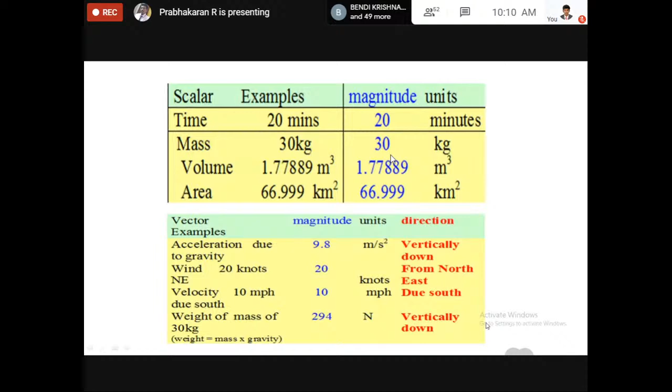In our FEA also, we have a specific topic for the two-dimensional scalar variable problem as the third unit, and the two-dimensional vector variable problem as the fourth unit. In my point of view, compared to all 5 units, the third unit we can understand easily in a technical way as well as the concept and the shortcut way, because we can easily understand the concept through our mathematical concepts.

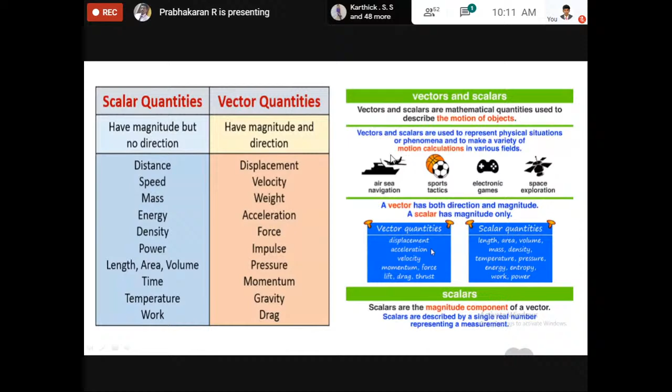So this is the simple introduction for scalar and vector quantities. Examples: distance, speed, mass, energy, density, power, length, area, volume, time, temperature, work. Every such quantity we can define with just the magnitude, but for this quantity we need to explain magnitude and direction. This is very familiar. So now we can move on with the topic.

So next, shape function. Already we have discussed; already I taught only the one-dimensional shape function. So what is a shape function? Why are we using a shape function? The shape function is also called the interpolation function.

So how did the name come? We have discussed that in the previous classes. So I will just recall what the shape function is with some example. For example, I'm going to take a one-dimensional element for understanding the shape function easily. Already we have discussed it; just within 1 minute or 30 seconds, I will recall it.

I'm going to consider my one-dimensional bar element here. This is my first nodal point. This is the second nodal point. I'm going to discuss the two-dimensional, but I just recall the one-dimensional, then only we can understand in a very deep manner. So here, two nodes, we have 2 degrees of freedom.

As well, I'm going to assume the temperature is 10 degrees, and the temperature at the second nodal point is 30 degrees. The total length I'm going to take as 100. So this is an example of a one-dimensional problem. Suppose I want to find out the temperature at the distance 50. What way can we find it out?

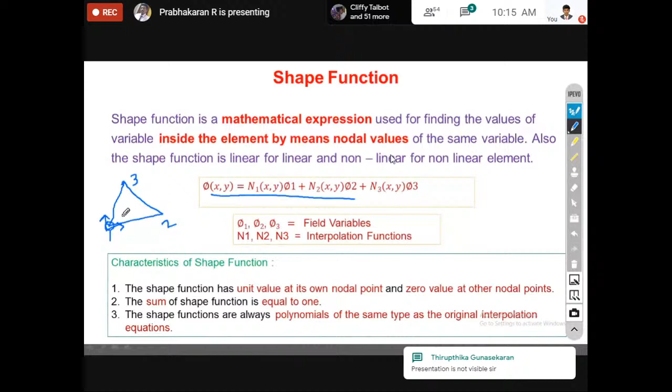So you can consider a triangular element. I'm going to consider it as the CST. I will explain what CST, LST, and QST are in the last lecture. Here I'm going to consider 2 degrees of freedom, 3 nodes, 6 degrees of freedom. From that we can define the CST element. For the 3 nodes, I'm going to define N1, N2 and N3 as my interpolation functions, shape functions. This is my field variable.

So these are the characteristics. I hope you can understand very clearly; this is very fundamental for FEA. Shape function characteristics, which we have already proved: unit value at its own nodal point, zero value at other nodal points. The sum of the shape functions is equal to 1.

We will solve the 2D triangular element shape function and the 2D rectangular element shape function. Definitely we can prove these sum equal to 1. And the shape function polynomial is the same type as the original interpolation equation. This is also a simple thing.

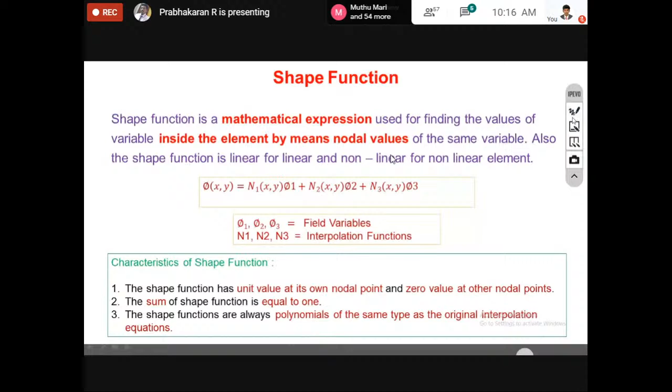Okay. So next, I'm going to consider one triangular element, because with this concept I'm going to solve the 2-dimensional triangular element. Okay, so here, don't worry about the degrees of freedom; I will explain later.

So here the triangular element has 3 nodes: this is the first node, this is the second node, and this is the third node. Every time we need to consider the anti-clockwise direction; as per that derivation it is very easy. I have taken the anti-clockwise direction, so nodes 1, 2, 3 are defined in an anti-clockwise manner. The first node is x1, y1, the second node x2, y2, the third node x3, y3.

So now I'm going to use the area coordinate method; that is the way I'm going to solve for the shape function. I'm going to split this triangle into 3 portions. This is the first node, and the opposite triangle is the area of the first element. This is the second node, and the opposite element is area 2. And this is the third one, the area of the third element. I have split it into 3 elements: A1, A2, A3.

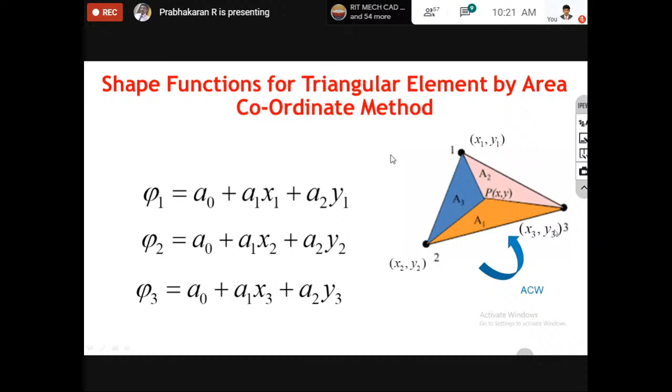Okay, just remember this is node 1. I'm going to take it in the counterclockwise direction: 2 and 3, and this is the central point. So from that I can write A1 as the determinant of 1 x y, 1 x2 y2, and 1 x3 y3. Next, I'm going to write A2 and A3 the same way.

So A2 uses the opposite side, x3 y3 and x1 y1. The same way, area 3 is 1 x y with the first and second nodal points. So this is the way I can write area 1, area 2, area 3, and the whole triangle area.

So now I'm going to substitute all the values in our shape function. Here N1 equals determinant of A1 by determinant of A. N2, N3, likewise I'm going to substitute. Finally, we will check our property, whether the sum of the shape functions is 1 or not.

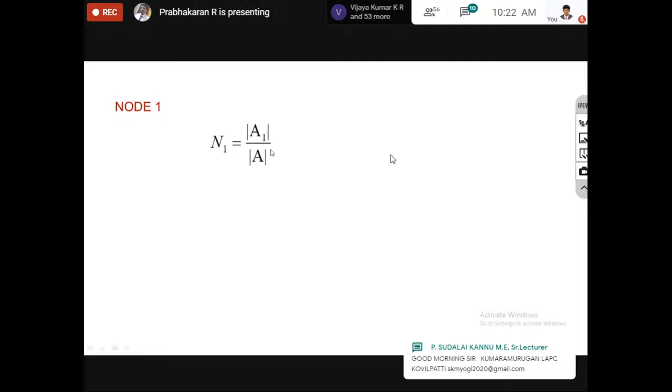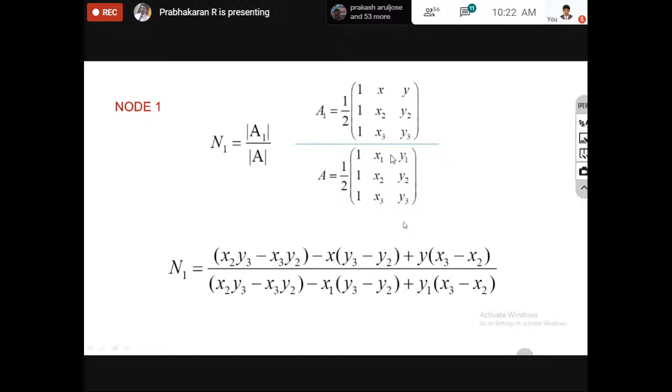So node 1, this is the simplest formula, N1 equals determinant of A1 by A. I can write A1 with nodes 2 and 3, and for the area of the overall triangle I have taken the determinant value. Finally the 1 by 2 will cancel, and the determinant value is achieved like that. I'm going to follow the same for node 2 and node 3.

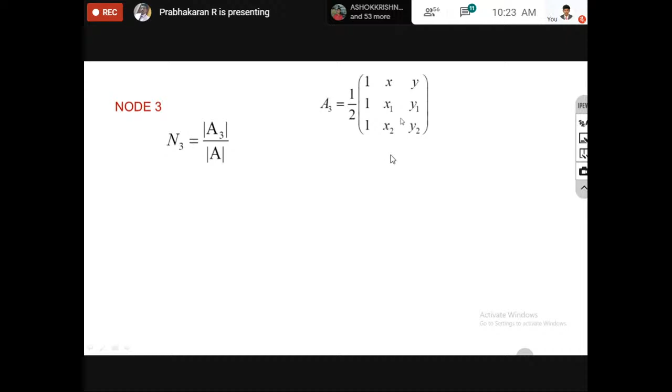The same way I'm going to write it for node 3. N3 equals A3 by A. For A3 I consider the first and second coordinates, and this is the area for the whole triangle. Finally, I have achieved the N3 value. This is the way we have achieved N1, N2 and N3.

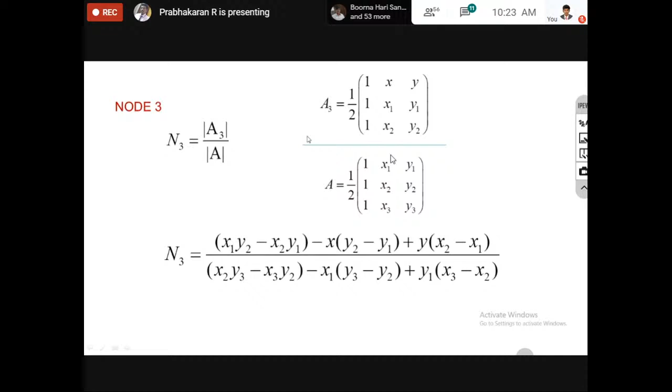So this we can simply understand from the concept. We don't want to bypass anything, from a student's point of view also, just to understand the concept of how we can solve shape functions in global and local coordinates. Anyway, this is the simplest way, the area coordinate method for getting shape functions.

Now I'm going to check whether our shape functions are valid or not. I have found N1, N2, N3, so I add the three: N1 plus N2 plus N3. Definitely we will achieve 1 because the denominator value is common for all. The x2, x3 and y2, y3 terms are the same everywhere. We have ordered all values, and finally we get 1. This is the final answer.

So whenever solving problems, we can simply remember these N1, N2, N3 for the two-dimensional triangular element. We are discussing scalar variable problems, and we cannot solve the problems without shape functions. This is the way we can understand how the

rectangular element. I'm going to analyze the rectangular element, which is also two-dimensional. I'm going to solve the shape function for the rectangular element using the local coordinate method. This is the bilinear quadrilateral element. Because it is rectangular, the opposite sides are the same: the breadth is equal and the height is equal. So we simply call it a bilinear quadrilateral element.

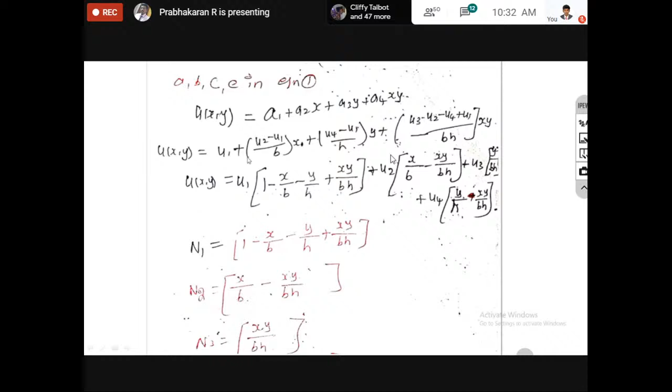So for the easy way, I have taken U1 as the common value. So finally we have obtained this equation: U1 times some value plus U2 times some value plus U3 and U4 values. So this gives our shape function. So I can rewrite here. Simply we can write it as U of X comma Y equal to

this I can consider as my N1, so this is N1 U1. The same way N2 U2 plus our shape function N3 U3 plus N4 U4. So for the shape functions N1, N2, N3, N4, we can write some equation. This is the way finally we got the result for the shape function.

So definitely we can check whether these shape functions are correct. So we will check the characteristics of the shape function. So finally this is N1, N2, N3, N4. So I'm going to check. Our sum of shape function values will be 1. I'm going to add all the values: N1 plus N2 plus N3 plus N4. So this is the final equation.

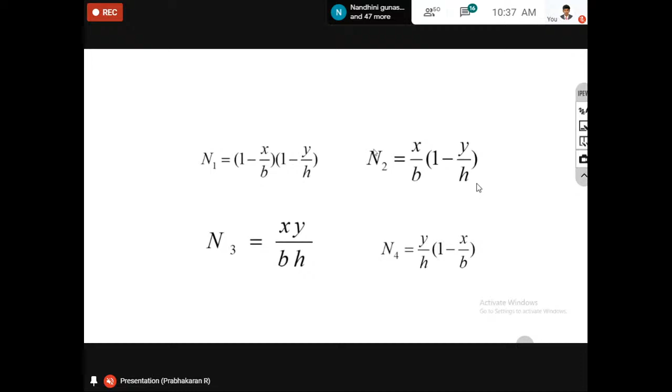Okay, so now I move on to the topic. So this is the simple trick. This is the very easiest thing. From the students' point of view, you may get a clear-cut idea about the two-dimensional scalar variable problem. Just understand two things. One is the triangular element. Second one is the rectangular element. If you consider the triangular element, you should remember three nodes; rectangular element, four nodes.

So like that, we write our shape function a1 plus a2x. Here we consider a1 plus a2x plus a3y. Next, if you consider the two-dimensional rectangular, a1 plus a2x plus a3y plus a4xy. So like that, you should remember. In many of the questions, whenever solving the problem, we should remember these key points. Sometimes they will give the coordinate point. We want to find out the temperature from the shape function because this is a scalar variable problem. So we don't discuss displacement and forces, because that comes under the category

of vector variable problems. But in my analytic point of view, the question may come in any of the third, fourth, fifth unit. It may be any type of question. So you should understand the concept, then only you can attempt it clearly. Sometimes they will give the point; we need to find out the temperature using the shape function. Sometimes they will give the temperature region; from the temperature region, we want to find out the point. So I will explain one by one, just to understand the key point.

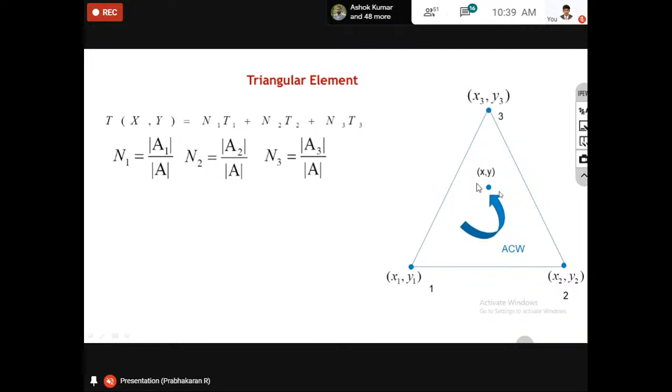So here I'm going to revise the triangular element. Three nodes: first, second, third node. I have taken the anti-clockwise direction. So we can write the shape function as T of x comma y equal to N1 T1 plus N2 T2 plus N3 T3. We have derived all those things. N1, we know that, because with the area coordinate method I have split it into 3 triangles. We can write the shape function like that.

So we know that A is the area of the whole triangle. We can write the area formula and the A1 formula. For the area formula I have considered the 3 nodes. For A1 I have considered nodes 2 and 3. So for A2, 3 and 1, and 1 and 2 for the third. So like that I can substitute my values. So once I got the N1 to N3 formulas, you can directly consider this direct approach. Definitely it gives an easier way to solve the problem.

So this is one of the concepts. If they give the temperature values and the 3 coordinate values, they may ask the temperature value at a particular point; we can easily solve the problem. Sometimes they may give a temperature region such as 50 degrees Celsius, and ask where that particular temperature region crosses. So definitely we want to find out the points. So this is the 50 degree region, for example.

Okay, this is the 50 degree region. So they may give 50 degree as a region, and they may ask what the points are. We want to find out the points XA and XB. Sometimes it may become like that also, so that time also you want to find out the particular 2 points. It depends upon our temperature value, so it may change.

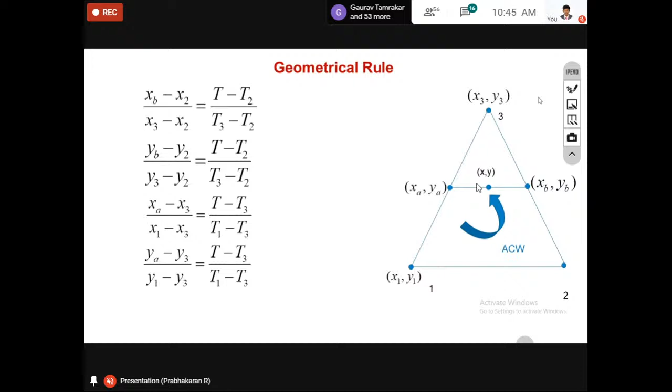I'm going to apply the same concept for the Y coordinate: YA minus Y3 divided by Y1 minus Y3 is equal to T minus T3 divided by T1 minus T3. Here also we know all values, Y3, Y1, T3 and T1, and T is the temperature region, so we can easily find out the YA value. This is the geometrical rule applied for the triangular element whenever we get the temperature region as data.

Next I'm going to take the rectangular element. Whenever we consider the rectangular element, I apply the same rule, again in the anti-clockwise direction. So N1, this is x1, y1, the first point, then the second, third, and fourth points. We know the simplest shape function for the four-node rectangular element, so I can consider N1 T1, N2 T2, N3 T3, and N4 T4.

We have already derived the shape functions. Finally, we got N1 is 1 minus x by b times 1 minus y by h. N2 is x by b times 1 minus y by h. N3 equals x y by b h, and N4 is y by h times 1 minus x by b.

If we know the temperature and the coordinates, we can find out the temperature at the central xy point. So at a particular point, what is the temperature? We can easily identify it through the shape functions N1 to N4. Suppose we get the temperature region as our data. So again, I want to use the geometrical rule. The same concept I'm going to apply here.

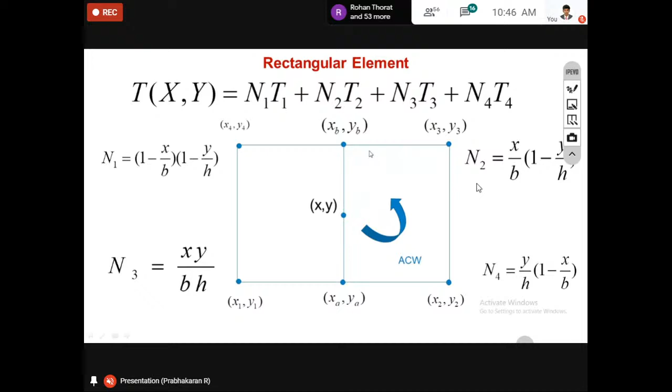So if it is the temperature region, it may be considered as 50 degrees Celsius or 60 degrees Celsius. We want to consider XA, YA and XB, YB. So the geometrical rule is the same concept. Here this is my XA, YA in the anti-clockwise direction. I can write it the same way. Here this is XB, YB. Better you consider the first equation without confusion, so you can easily understand.

So XA minus x1, and here I'm going to consider the second point. This is the second point. So divided by x2 minus x1 is equal to t minus t1, divided by t2 minus t1. This is the way. The temperatures t1, t2 and the values x1, x2 are all known values. From that, you can find out your XA value.

Now I'm going to find out my y coordinate. I can write it the same way. YA minus y1 divided by y2 minus y1 is equal to t minus t1 divided by t2 minus t1. The same way I can rewrite it as the equation. We know all the temperature values and the region temperature value. So this is the unknown value. We can easily find out where the temperature region crosses that particular point.

So again, I want to travel in the anti-clockwise direction. This is the next point, the unknown point. I consider this anti-clockwise as 1, this is 2, this is 3, and this is 4. So from that I have found out this unknown. Next is the unknown xb, yb. I can write the equation as xb minus x3 divided by x4 minus x3 is equal to t minus t3 divided by t4 minus t3. So from the region value and all other values, we can find it.

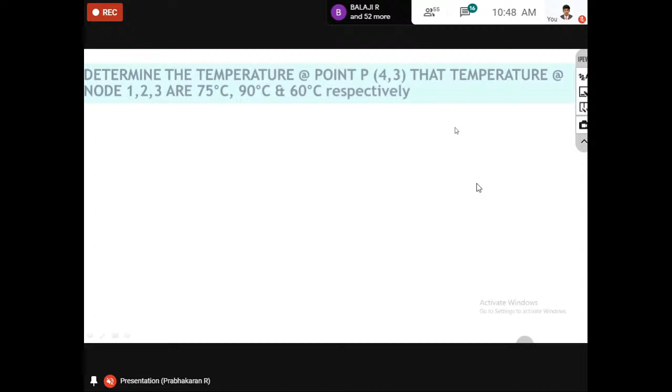So next, I'm going to consider a problem. This session we have planned especially for problems. In the coming session, we need to solve more problems for understanding the concepts.

Determine the temperature at point P (4,3). The temperatures at nodes 1, 2, 3 of the 3-noded triangular element are 75 degrees Celsius, 90 degrees Celsius, and 60 degrees Celsius respectively. So at points 1, 2, 3: 75, 90, and 60. The coordinates are (2,2), (7,4), (3,6). I'm going to find out the temperature value at the particular point. This is a scalar variable, so only the temperature at that point.

Just recall the known formula: the temperature function T(x,y) equals N1 T1 plus N2 T2 plus N3 T3. Here T1, T2, T3 are all known values, taken directly from the question. So we want to find out the N1, N2 and N3 values. N1 is determinant of A1 by A, N2 is determinant of A2 by A, N3 is determinant of A3 by A. So the unknowns are the A1 and A values.

We have a formula. If you want to find out the whole triangle area, I consider the nodal coordinate values for 1, 2, 3: 1 x1 y1, 1 x2 y2, 1 x3 y3. From that we can easily get the area. Otherwise you can simply substitute your breadth and height in the half into BH formula, and you will get your triangular area.

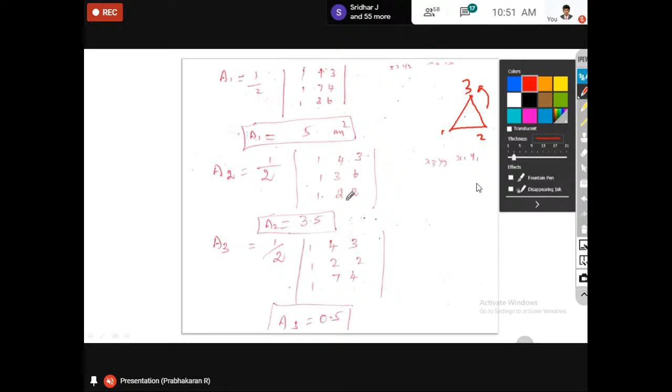For example, I have taken my triangle 1, 2, 3. Anti-clockwise direction, if you consider this one, it's 3 and 1. So x3, y3 and x1, y1. This is for x, y, the centroid, I mean the central point value. This is the way I have obtained my A2 value. This is the simplest way of solving the problem. Just understand the concept of the shape function; these are all very easy.

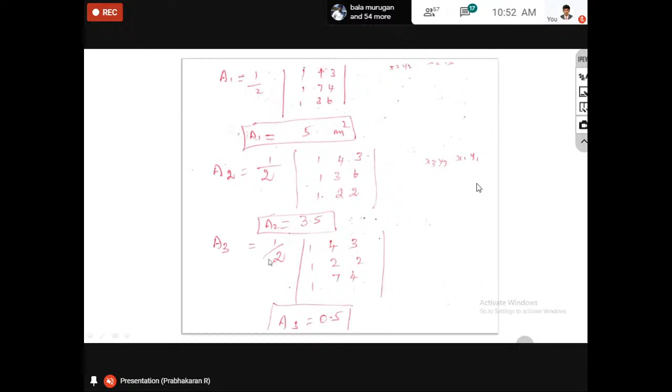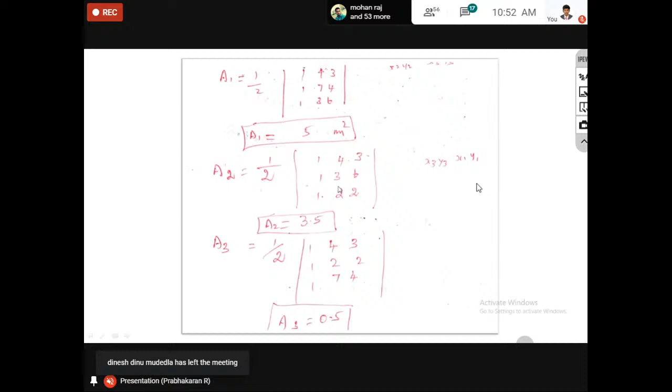A3 means 1 and 2. So I have considered x1, y1 and x2, y2, and x, y is the particular point. So you will get the A3 value. Now you can substitute all the values in our shape function. N1 equals determinant of A1 by determinant of A, N2 equals determinant of A2 by A, N3 equals determinant of A3 by A. We know all the values, so I have substituted N1, N2, N3 here.

In the question we know the temperatures as 75, 90, 60 degrees Celsius for each nodal point. I multiplied, and finally I got the temperature as 80 degrees Celsius at (4,3). Again, remember the concept: what is the interpolation function? We can find out the unknown value within the element. So at (4,3) within the element, I can find my temperature value using the shape function or interpolation function.

This is the simplest problem; I have taken only 3 nodes and solved it in a very easy manner. If you consider a QST or LST element, the number of nodes will increase, and that time it will be difficult. We can solve the problem, but we need to go for the computer. That's why we use software like ANSYS, Abaqus, HyperMesh, Nastran, which give more accurate results. But the mathematical concept behind it is the way we have obtained the shape function.

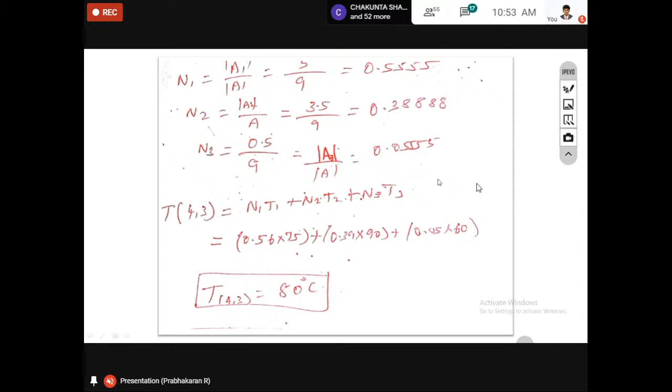Next, the second sum. Nodal coordinates of a triangular element; at the internal point P, the x coordinate is 3.3 and N1 is 0.3. Determine N2, N3 and the y coordinate of P. I will draw a simple diagram of my triangular element with first, second, third points. Point P has x coordinate 3.3; the y value is not given, so we want to find the y coordinate. They have given N1, so we need to find N2 and N3.

This is a simple problem from the shape function, and we came across so many formulas; that formula derivation is very helpful for solving this problem. First, second, third node; for the center point, x is given and we want y. N1 is given; we want N2 and N3. So again, remember your shape function and area formula. Here I can write A1 with x, y, 2 and 3.

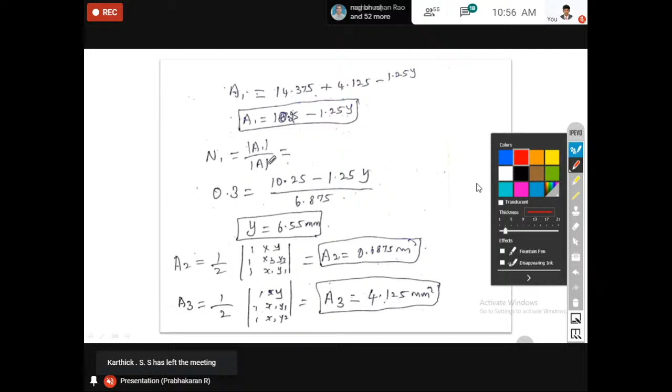Okay, so here I'm going to rewrite a1. I'm going to add 28.75 and 8.25, and divide both constants by 2. So finally 10.25 minus 1.25y, this is my a1 value. One special thing: in the question we have the n1 value, so n1 we already know. n1 equals a1 by a. We have a1 in terms of y, and we have found the area value. From that we can find out the y value.

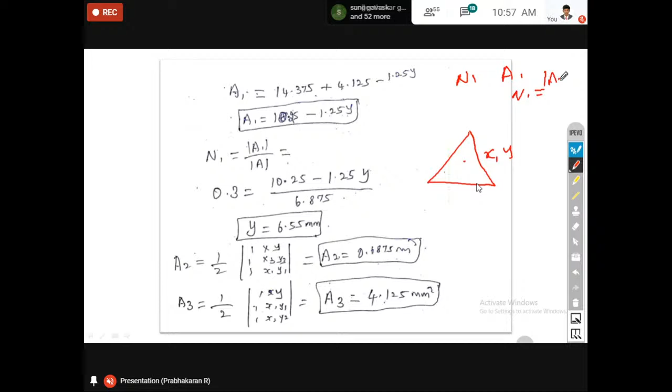Okay, if you consider this is your triangular element, in the question we have x. Now I have found y from n1, my shape function a1 formula, and my shape function formula n1 equals determinant of a1 by a. From those three formulas we have obtained our y value. Again, in the question we need to find n2 and n3, they already asked for them. So now I am going to find n2 and n3.

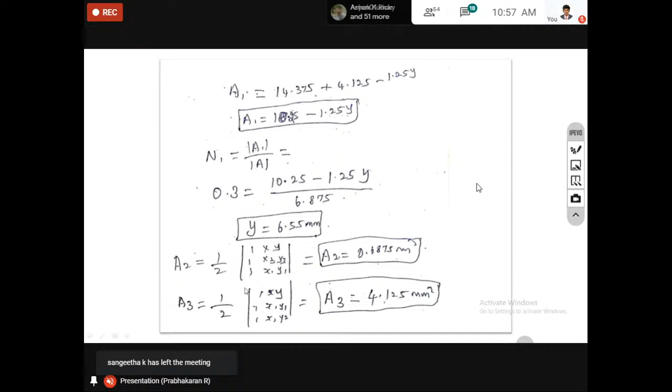n2 equals a2 by a, n3 equals a3 by a. We know the a value, but we don't know a2 and a3, so we want to find them. Now I'm going to find a2 value. I'm going to substitute nodes 3 and 1. If you take the third node, you want to consider 1 and 2. This is the simplest thing you should remember. From that I can obtain my a2 and a3 values by simply substituting into my equation.

Sorry for this scribbling, you can understand. a2 equals 1 by 2 times the determinant of 1 x y, 1 x3 y3, 1 x1 y1. We know all the values, so we can obtain the a2 value and a3 value. n1 is already given, n2 is a2 by a, n3 is a3 by a. Finally we got 0.1 and 0.6.

Okay. We know the characteristics of the shape function: the sum of the shape function values will be 1. At one nodal point it will be 1, at the other nodal points it will be 0. So here we can check our problem with the shape function characteristics. n1 equals 0.3, n2 equals 0.1, n3 equals 0.6. We get 1, so it satisfies the characteristics of the shape function. This is the simple second type problem for the scalar variable.

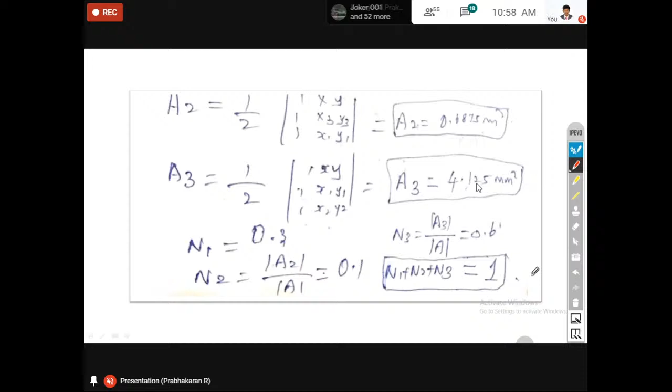Next I'm going to talk about the third type problem: if in the question they give a temperature region, how to find the coordinate value using the shape function. Read the question. Find the temperature at point P of (1, 1.5) inside the triangular element, where the nodal temperatures are given as T1 equal to 40, 34, 46. Also determine the location of 42 degrees Celsius. This is the third type of problem for the scalar variable.

Two-dimensional triangular element. Here I want to find the location of the 42 degrees Celsius contour line for the triangular element. Just watch this concept. Here this is for 40 degrees Celsius, this is for 34 degrees, this is for 46 degrees. So 42 degrees will lie between 40 and 46. So our point will be on this side.

I can take this edge as 40, 46; 42 is definitely between 40 and 46. It is not possible for it to come between 34 and 40, because this is 42. So here there is no possible way. And also I am going to take 34, 46. Definitely 42 may be obtained in between, so the second point will be obtained. So we want to find out the XA, YA value and the XB, YB value.

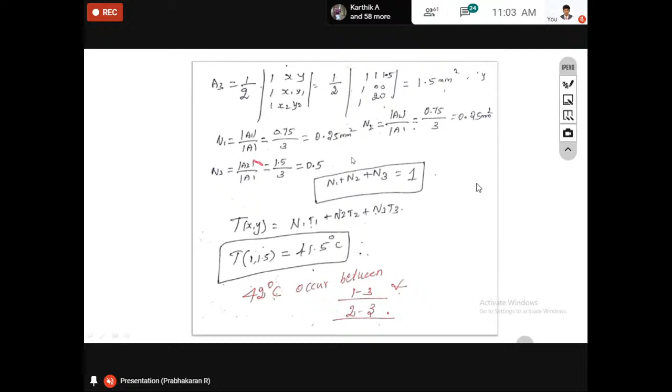Here I want to find out yb. yb minus y2 divided by y3 minus y2 is equal to T minus T2 divided by T3 minus T2. Very simple. We know T2, T3, y2, y3, and the temperature is 42, so we can get the unknown yb value. So for that contour line, we have found our location as XB and YB. Everything is fundamental to the shape function.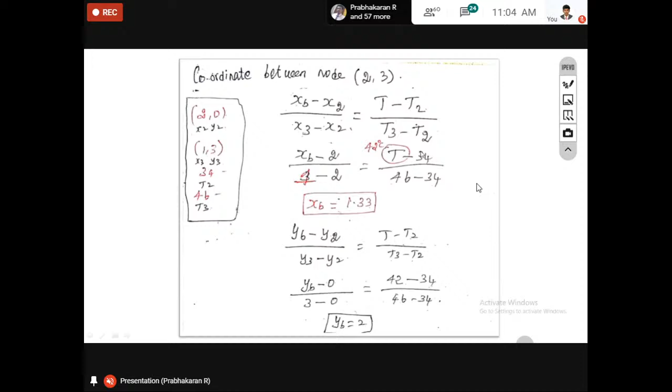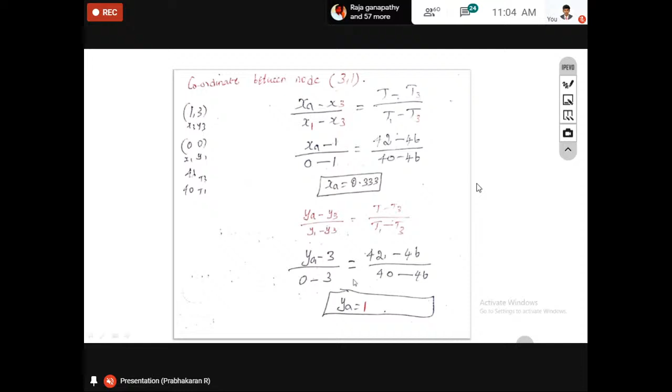Next I want to find out XA and YA. This is my anti-clockwise direction. XA minus x3 divided by x1 minus x3 is equal to T minus T3 divided by T1 minus T3. Like that we can find out the value. From that, everything is a known value. I hope you can understand very clearly. The temperature is the contour line. Here all the values are known, so YA is the unknown value and we can find out the YA value. Like that you can easily solve your problems.

Next I'm going to solve a problem with the rectangular element. A rectangular element has 4 nodes, so I'm going to consider N1, N2, N3, N4 as our shape functions.

We have achieved this formula from that derivation: (1 minus x/b)(1 minus y/h). So we can also try the shape function with a different model. From the same concept, the same boundary condition, we will get some trial N1, N2, N3, N4 as the shape function. From the shape function we can find out our intermediate values. We can try the shape function in our own way.

So these are the 4 nodal rectangular element coordinates. Here I am going to consider this as the rectangular element. I hope you can assume this one: 1, 2, 3 and 4, so the 4 nodes N1, N2, N3, N4. Here the temperatures are T1, T2, T3, T4, and this is the central point temperature at (2,1). So here, this is the (2,1) point.

Now I'm going to substitute my values. B is the breadth value. If you have written the points as (0,0), (3,0), the third point as (3,2), and the fourth point as (0,2), from that you can obtain it. So here the breadth is 3 and the height is 2. Instead of breadth and height, you can substitute your 3 and 2 values.

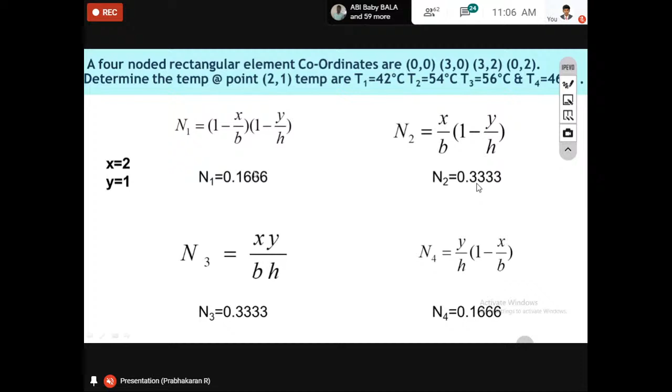So finally T(x, y) for the rectangular element is N1 T1 plus N2 T2 plus N3 T3 plus N4 T4. We know all the values N1, N2, N3, N4, so we can find out the temperature for the particular point. Remember, for the rectangular element we got that question with a contour line.

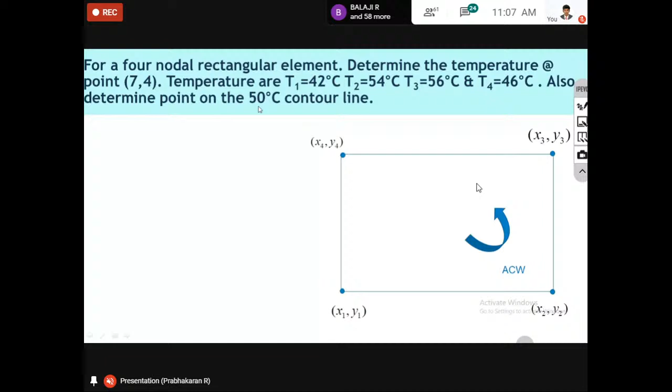For a 4 nodal rectangular element, determine the temperature at point (7,4). So (7,4) may be the central point. The temperatures are 42, 54, 56, 46. So here this is 42, 54, I'm going to take this as 56, and this as 46.

Also determine the point at 50 degrees Celsius. Where will 50 degrees Celsius occur? Between 42 and 54, definitely one point will occur. Between 54 and 56, not 50. Between 46 and 56, definitely 50 will be achieved. Again between 46 and 42, it won't come. So our intermediate points may be here and there. Like that we can easily understand our problems.

The same rule I'm going to use, but the shape function will be very different. We know the shape function defines the shape of the element, so if the shape of the element varies, the shape function will vary. So this is my central point, and this is my region at 50 degrees Celsius. Finally, two points will occur: one is (xA, yA), the second one is (xB, yB).

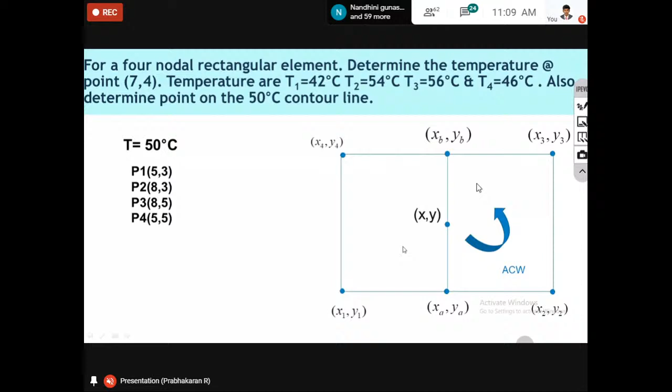Finally, I'm going to substitute my values. I don't want to explain the whole problem, I will just give some idea so you may understand the concept. We know all the P1, P2, P3, P4 point values, so you may understand which one is the breadth B and which one is the height H. For example, from the first and second coordinate values of x you may get the B value, and the other gives the H value.

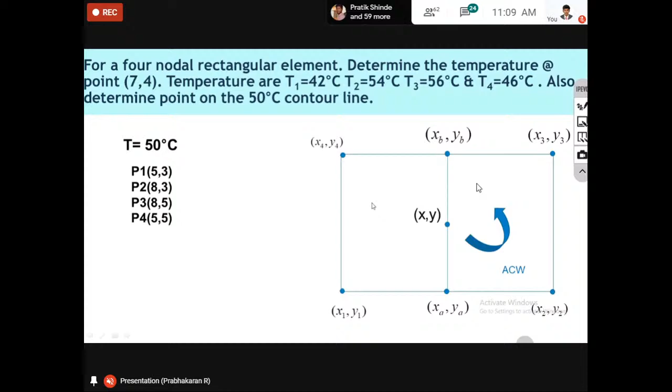So the B and H values we know. x and y are already given in the question as (7,4). From that we may get the temperature for the particular point (7,4). Next I want to find out the second thing, that is the contour region. You can use your shape function.

So B and H, breadth and height values, we know. X and Y are the unknown values, I mean that particular point value. So N1, N2, N3, N4. So our shape function T of X, Y equals N1 T1 plus N2 T2 plus N3 T3 plus N4 T4. So from that definitely we can achieve the temperature value.

Now I want to find out the contour region location value. So definitely we need to use our geometrical rule. Okay. So again, this is for the rectangle, anti-clockwise direction. If I take XA as my point, XA minus X1 divided by X2 minus X1 equals T minus known value.

This is a field variable. Don't consider it only as temperature; it depends upon the problem. Any scalar quantity may come at whatever the point. Okay. So here I'm going to take it as the temperature. So T minus T1 divided by T2 minus T1, and the same concept I'm going to apply for YA minus Y1 divided by Y2 minus Y1, equal to T minus T1 divided by T2 minus T1.

Here we know all the values. From that definitely we can find out our XA, YA value. The same concept I'm going to apply for XB and YB. Here we know the anti-clockwise direction. So we consider XB minus X3 divided by X4 minus X3 equal to T minus T3 divided by T4 minus T3. Like that you should consider your geometrical rule.

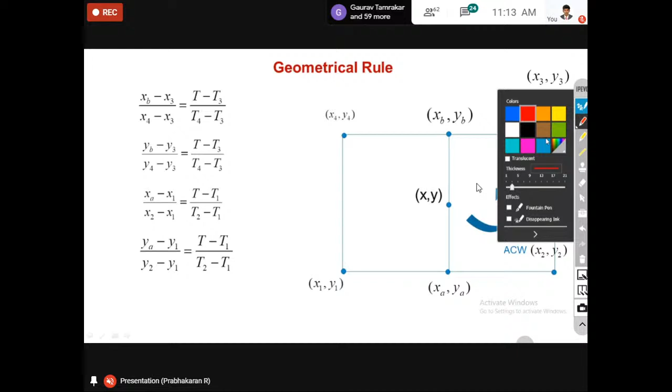Okay, like that I'm going to explain for our two-dimensional element, how we can achieve accuracy. That's why we are going to discuss CST, LST and QST elements. In further lectures we will discuss in a very deep manner how to achieve the shape function in the constant strain triangular element. I think we can solve the shape function for the CST element. LST and QST are very difficult.

So for getting more accuracy, what is meant by CST? CST means the constant strain triangular element. The next one is the LST element, linear strain triangular element, and the quadratic strain triangular element. What is the difference between CST, LST and QST? I will give a few more ideas. So here I am going to consider the constant strain triangular element. Definitely this is for the triangular element.

So far it was the scalar variable. I have discussed almost all those things behind the scalar. Next we want to enter the vector. So I'm going to consider the triangular element. Each node has 2 degrees of freedom because of X and Y, X and Y, X and Y.

I have considered all those things because hereafter we are going to discuss the vector; we want to find out force as well as displacement. Definitely it has both magnitude and direction. So I'm going to consider 2 degrees of freedom at each node. You can easily understand we have 3 nodes: 1, 2, 3. Each node has 2 degrees of freedom, so definitely 6 degrees of freedom.

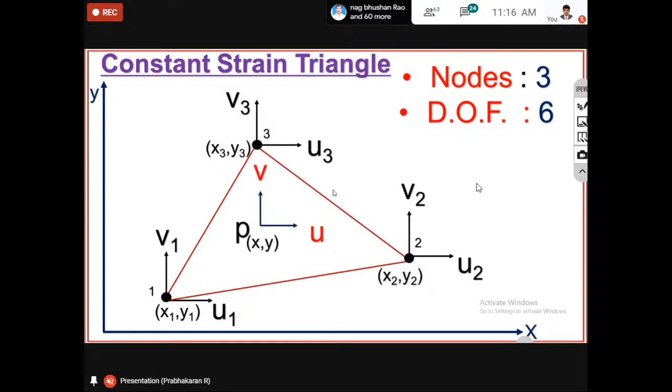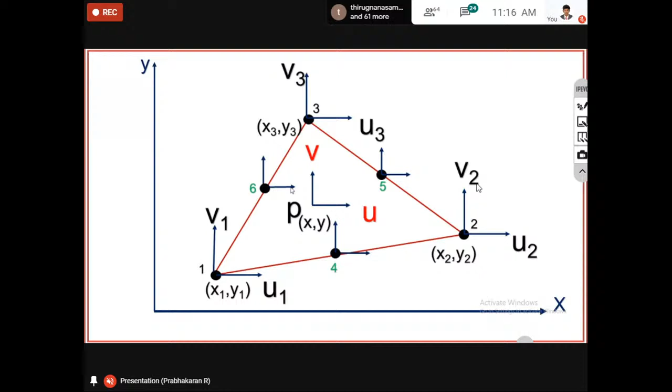So it may not give more accuracy. Now we have taken the inside as one of the nodes, so definitely we will get more accuracy than the CST element. With LST we can understand the behavior inside the element and find the stresses in each element. That's why we use the LST element for the analysis. Here there are 6 nodes, each with 2 degrees of freedom, so finally we achieve 12 degrees of freedom.

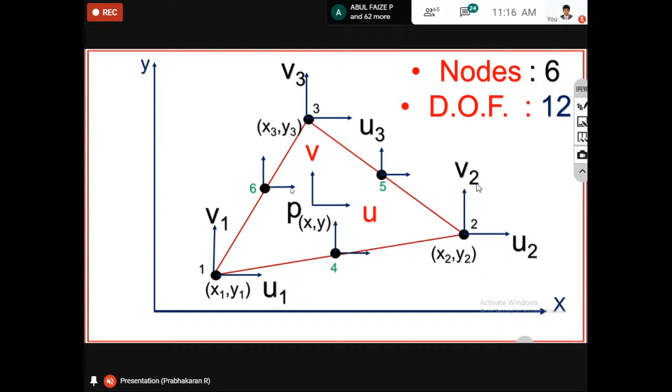Next I'm going to consider the quadratic strain triangular element. This is very simple. Here first node, second node, third node is CST. In LST and QST we have additional nodes: 1, 2 and 3, here 4, 5, 6, 7, 8, 9, and we have one central node inside the element. So we have 10 nodes; 10 times 2 is 20. Finally we got 20 degrees of freedom.

We can solve the shape function for this element, but it is very tedious. In software we can create lakhs of nodes. So with this I'm going to conclude my lecture. Now it is your turn; you can ask some questions and I will answer. Within 1 or 2 minutes I will recall everything.

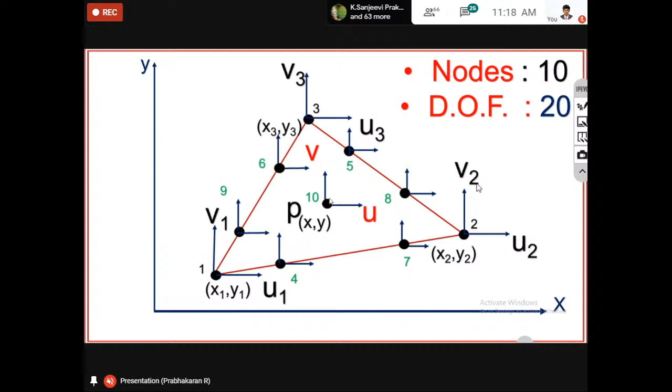In the FEA point of view, we have almost covered the 3rd unit, scalar variable problems, and we have touched the 4th unit, vector variables. These are the fundamentals behind it. When we discuss vector variables, we continue from the shape function: what the stiffness matrix is, the strain-displacement matrix, the stress-strain relationship matrix, how material properties come into the picture, and how coordinates are integrated in the B strain-displacement matrix. Everything we will discuss in the vector variable problem, understanding scalar versus vector quantities.

This afternoon session, before 2:50 p.m., participants, don't miss any hands-on training in this series. Whatever we studied we can visualize through software, for a better understanding of how the shape function works. In ANSYS APDL we can get results at each nodal point. ANSYS is very good for getting results. ANSYS Workbench may be more familiar and easy, but compared to APDL, getting results is somewhat difficult.